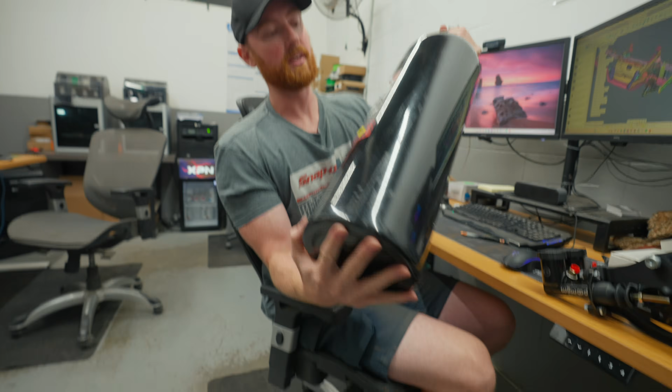Simple. Things I'm working on right now - I need to relocate this nitrous outlet bottle. This is a 15-pound extra tall bottle, total weight after it's full with liquid nitrous is 32.75 pounds. So whatever I make has to be able to handle quite a few G's while holding onto this.

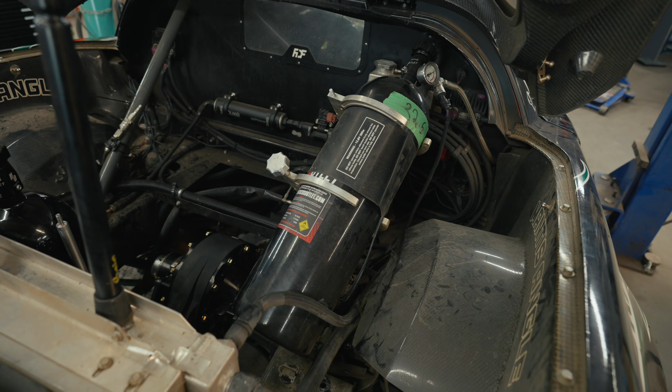I have the CAD model, I've decided where I think I want it, and basically I'm going to put it vertically. I found that I'm not using about 4 pounds of nitrous where my current bottle location is, which is on an angle mounted to my half laterals tubes on the roll cage. So I want to mount it vertically, but the bottles are too tall - it does not clear my rear trunk.

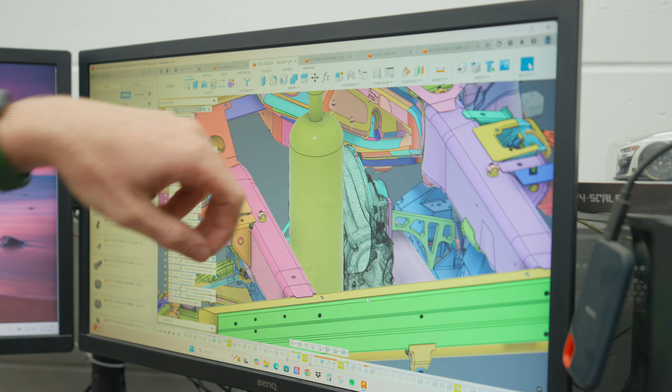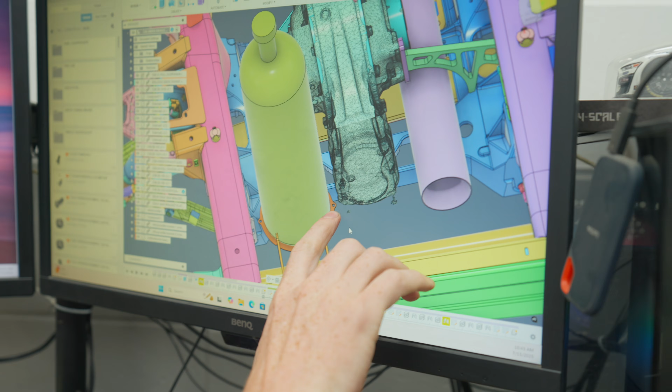So here's what I've discovered. I can mount it nice and low vertically right next to my quick change if I make a bracket off of my sway bar, and then make a vertical support with some kind of cap. Also, FD recently got rid of the clamp styles, making them illegal - I believe Ferris crashed at Road Atlanta and his bottle went flying out of the car because the clamps didn't go all the way around and didn't clamp it enough. So we're going to do a full containment style where we'll have a tube or bar come up from the bottom, and then probably a hinge style that comes down on top of the bottle and holds it down - left, right, up.

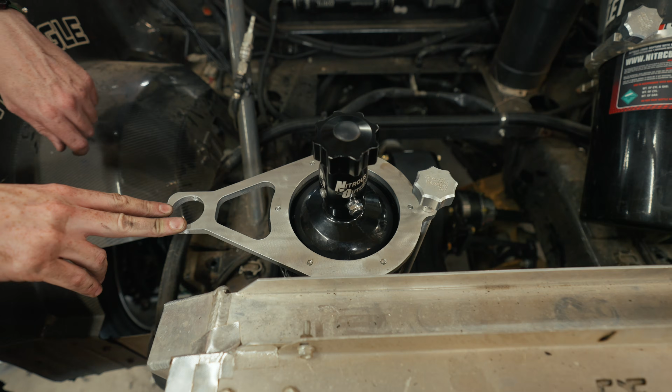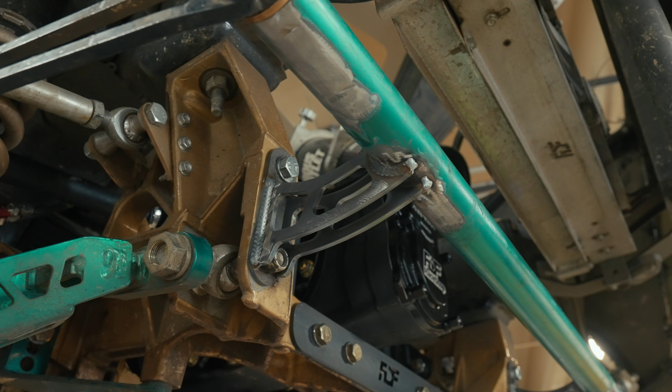Because of my bottle location, I had my sway bar mounted on top of the frame rails, bolted to these going to my rear upper, but I actually changed the location, brought it back down to kind of the OEM area, spaced it back to give me room for the diff, and now I have blades going to the control arms. You can see all that on the car. We won't have time to powder coat all these things because we have an event to leave in 2 days, but that is what I'm working on today.

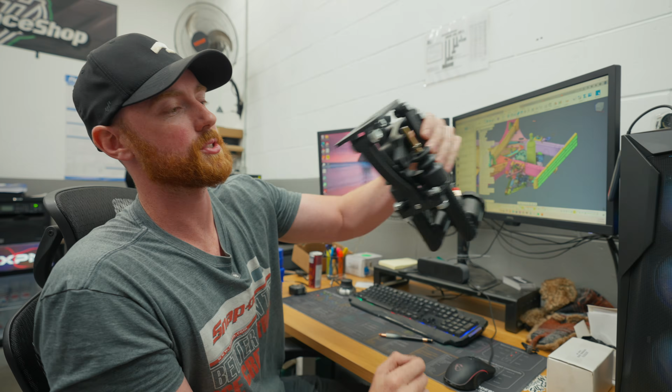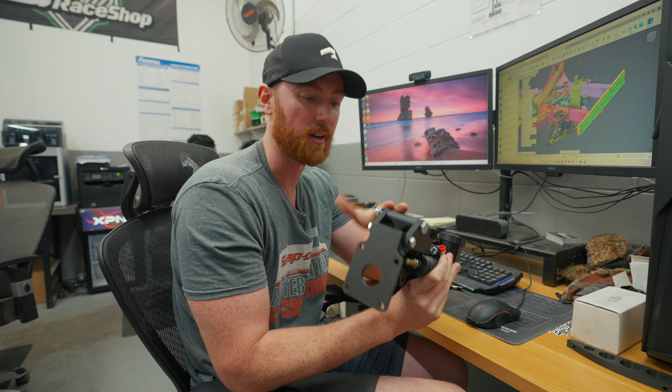Things I've been working on - this is a really nifty design I came up with. Basically there's 3 cars I've wanted to make a bias bar booster delete kit for. Vasily wanted one for his Audi, I wanted one for the E46 wagon, and I already made one for the Corvette. The problem is all these cars have different firewall flanges. Not only are they different firewall flanges, but the locations of where the bolts are consistently would interfere with where we'd have welded parts, so I had to get rid of all the welded parts.

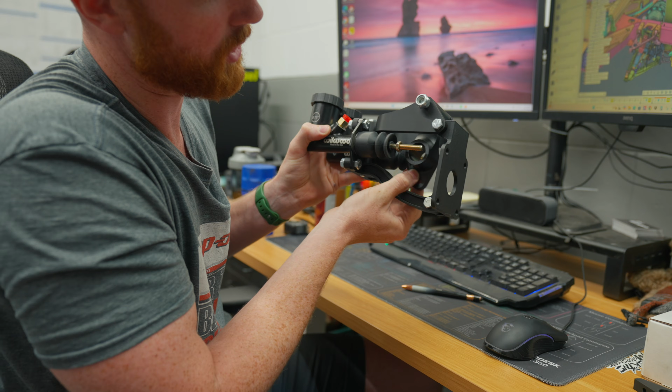So these are all going to be billet machine parts. We're actually working on these now - they'll be done in probably a week or 2, but this is the 3D printed version. We have our pivot arm, our fulcrum arm, which is what we use on the Corvette kit already. But the cool thing is this front plate is now interchangeable so I can mount a different front plate and basically fit this to every chassis just by changing the front plate. Looks simple, took a ton of time to come up with this.

Anything that is simple, the only reason it looks simple is because somebody spent a ton of time making it look that way. So this does look simple, but we've got our support from the bottom, bracing, our top, all nice joint connections. This plate is going to be easy for us to reproduce in multiple configurations. I've already designed the BMW - we've got an IS300, a Corvette, etc., etc., etc. These parts are going to be reusable for every chassis.

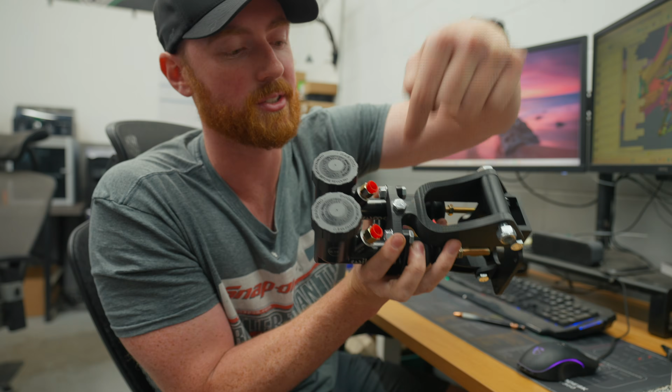So we can basically produce 50 to 100 of these at a time and only batch produce these, and this whole thing is going to work really nicely. I also have a support here joining the master mount blocks, so there's a bolt that goes through. I only had a hex bolt at the time, but it's actually going to be a socket head. It's going to be really clean, really nice, billet, all the stuff. So that's something I worked on for the last several days. I do have a CAD model of it.

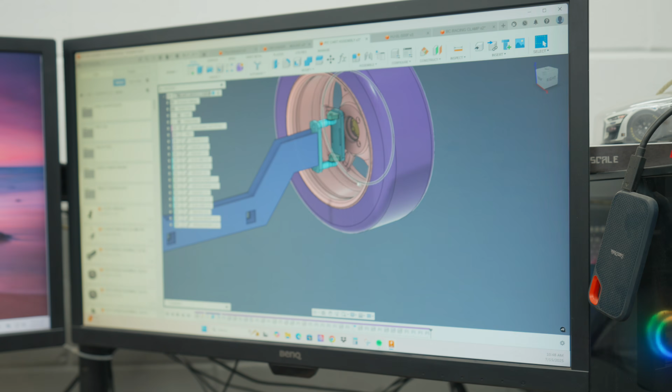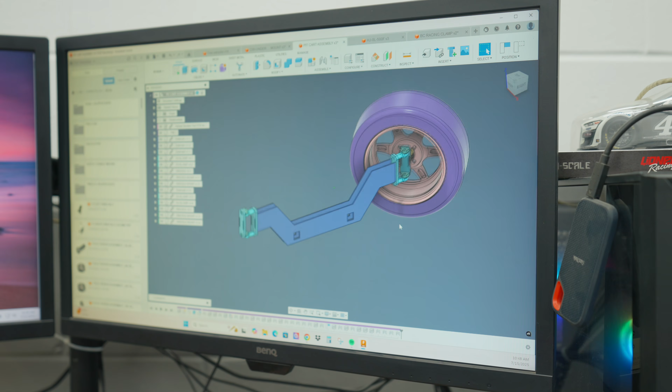Something else I'm working on, I am designing a pit cart. We're gonna be working with Kansei wheels, so they sent me the model for their wheels, and this is gonna be the front section of it. Basically, we're gonna be able to get like 80 degrees. I'm gonna have a wagon style tow bar here that's gonna be connected to tie rods, joining the left and right. I'm actually gonna put this truss structure front and rear, so the wheels will be able to turn both front and rear. I'll probably lock out the rear, but just having that ability in tight spaces is gonna be sweet. These are gonna be 4 square tubes that run the frame. I just started this last night, in my spare time, and I've barely made any progress on it. So that's another thing we're gonna be building.

We're gonna have lots of cool videos on this. Basically, I'm gonna lay everything out on the floor, take a big photo of everything I want on a pit cart, put it into the computer, design it, make it repeatable, and utilize everybody and all of our skills to produce this, maybe as a product, but definitely not right off the bat. These things, we want to build it, run it ourselves, find ways to improve it, and go on that way.

This is to give you guys perspective. We probably design 20 to 30 things a week, maybe more, and then you don't see any of it.

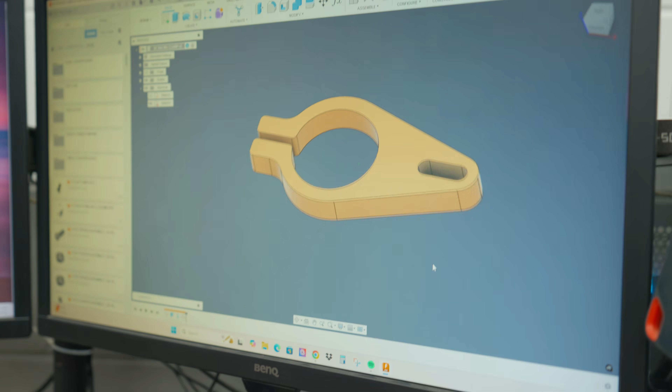This is just a BC Racing reservoir clamp. I'm gonna water jet cut this at a half inch, pop an M6 hole through here, probably thread the other half, and this is gonna be just an auxiliary clamp for the BC brackets. We could totally machine this, spend a bunch of time on it, make it super nice, maybe even list these on the website. I think that would actually be a great idea and product, but we just gotta bang these things out and get them on the car, and that's kind of how a lot of products come from that.

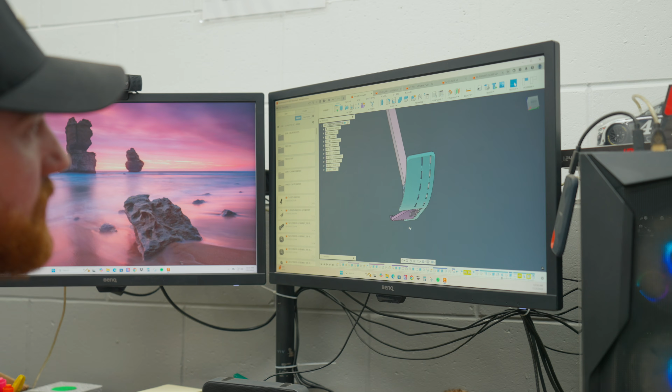There's so many things going on under the radar that you guys really don't ever get to see. Another thing we made, this is on the FDF industrial side of things. I'm not gonna say what it is, other than we're gonna be making a bunch of them, and it's a super cool project that I was doing. Essentially, you might be able to see how it would do things, but this is another cool project I was working on a couple weeks ago.

Perspective. We're designing things at a crazy rate and always testing stuff in the background. Some of the products you guys are seeing, we made a year or 2 years ago. Went through all of the testing, all of the design, all of the reworks, and now you're just seeing it. For example, all of the GR stuff that we just released. I think we released 6 products all at the same time on Friday. These products were in testing and design well over a year ago. Then we tested them throughout the winter. Then we made slight modifications. Then we sent more kits for testing out to our drivers like Elliot, who took it on to Drift Week, found one small improvement to be made, not necessarily by necessity, but just to make it that much better. Now that product is perfected, tested by multiple people, it's on the market as of last week, Friday, along with all of the other products. The rack relocation kit has been on a car for a long time, things like that.

On a daily basis, we've got a ton of stuff. On a weekly basis, we're gonna sum it all up into a video and deliver it to you guys on design time. Actually, we can do a little walk around of the car. There's quite a few things that, again, we just whipped up. You're never gonna see it, but it's on the car, and it's basically into use. There's so many things.

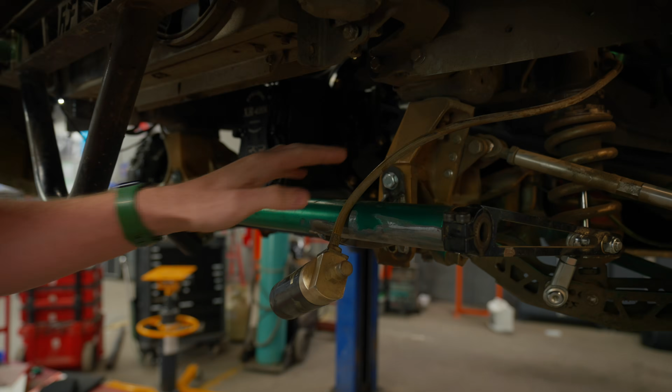Coming out to the car, we have the sway bar relocation. These plates here we had to design, make, and weld - we did this yesterday. These canisters I'm going to mount somewhere easy to reach, and we have to mount them well because these joints can leak and fail if you put any stress on them.

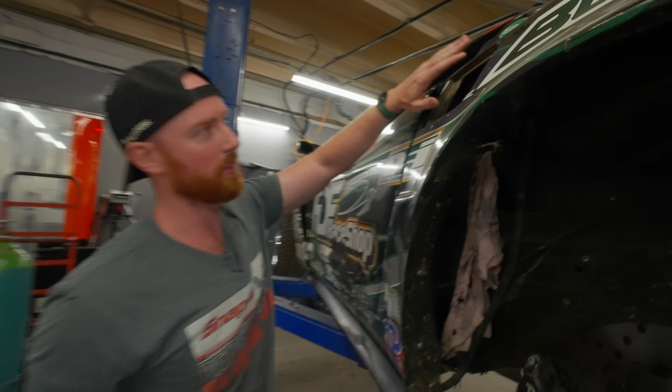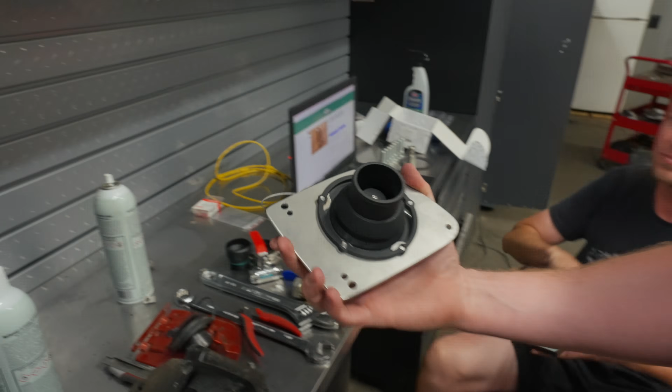You can see we've got the OEM section of the Corvette removed. Do you know where that gas door plate is? So here's the OEM setup, and then we made this super quick - a plate that's going to essentially replace that.

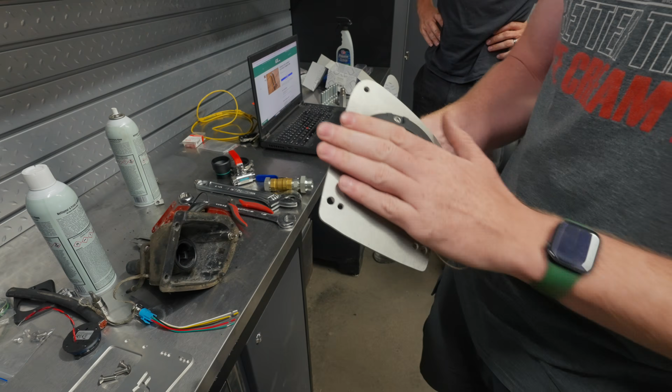This is the new performance fill cap. We want to get this on the car but in an OEM fashion, so we're going to make an adapter to connect it to the factory hose, and then send this out to James on the car we just finished, and put one on my car. It's just going to make filling it up a little bit easier, a little more race car, a little less OEM, although the OEM stuff obviously works great.

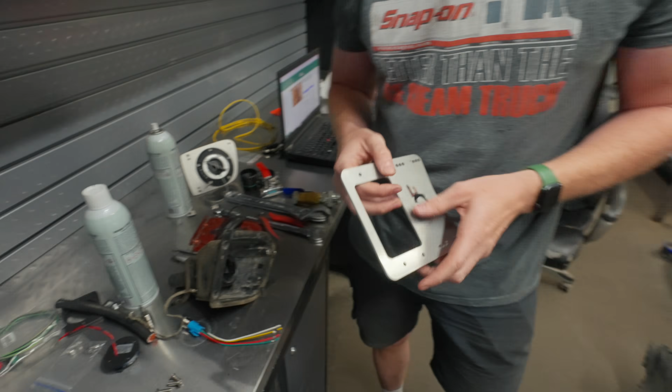On the Rush car - the design time we put into it all within a day. I scanned three parts of the car, designed seat brackets to hold the D&D seat, and made a dash mount. Once we put a different seat in it, we had to raise the steering column, which we needed to do anyways, because my knees were hitting the dash and the wheel, and the wheel was rubbing against my thighs, so we raised the steering wheel.

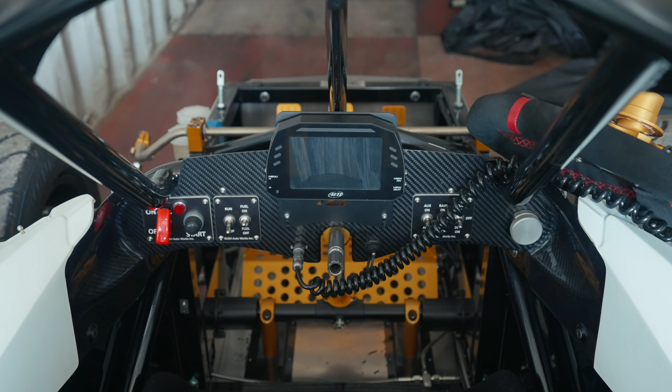This is for the AIM dash that comes with the car. We raised it up - I wasn't sure where it was going to fit, so we put multiple holes.

We also made a block off for the side pods. We drove the car through the gravel outside, and right off the bat the tire threw a bunch of gravel into the side pod - probably had 200 little stones sitting in there. I didn't want rain or rocks smashing all the electronics in the side pod, so we 3D scanned it and made a plate that zip ties in real easy, lines up with all the tubes. We threw that in.

Again, these are things we wouldn't even talk about, but we do stuff like this all day. We've got an IS300 in over there, and we're already doing some design work on that - adding some undercarriage braces and things like that.

I also did something on my diff - I raised it up slightly. The problem with Corvettes is the factory exhaust goes over the axle and out the rear, which creates a very long exhaust system plus generates a ton of heat in a concentrated area. So I raised the diff slightly and made a custom diff mount that we're not going to offer to the public, since this is just for my car, because I wanted the exhaust to go under the axle.

I needed to raise the diff a little bit, and now my exhaust is going under. Mike's going to come in and whip up some titanium 4-inch pipe that's going to blast right under the axle, and I can show you that.

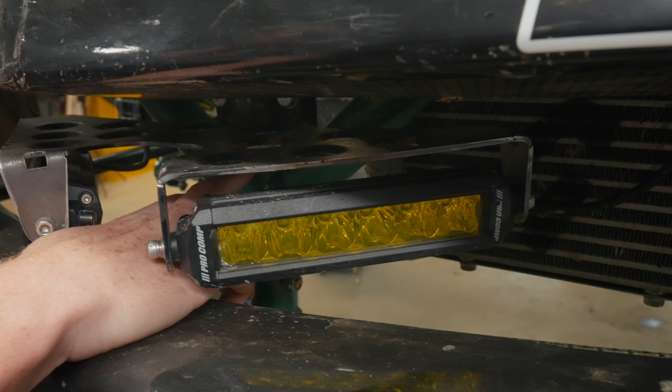One other thing - we also made this 45-degree light bracket that connects to a center tube on the bash bar. The lights are going to display at the angle of drift, since there's no reason headlights should point forward on a drift car because we're never driving straight. So we whipped that up and threw it in.

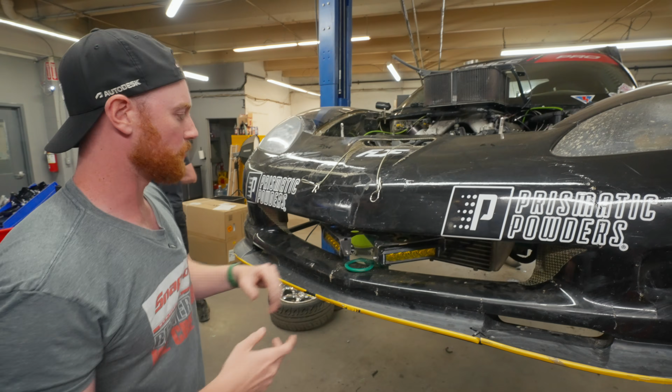These are also some tow hooks - just a single stud that goes through. This plate's welded to a tube, just a nice little hoop. It goes to the bash bar, and right here it's got this nice arc and connects to the tow arm stud.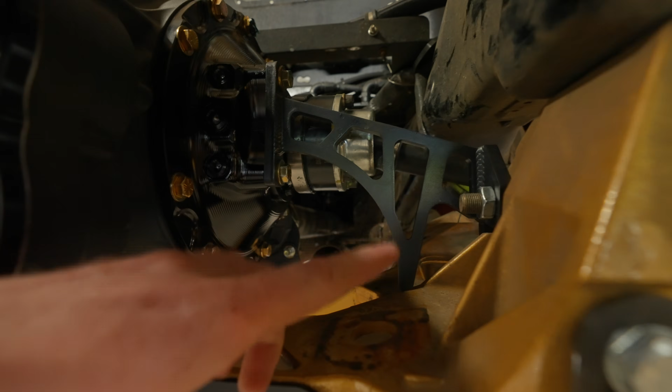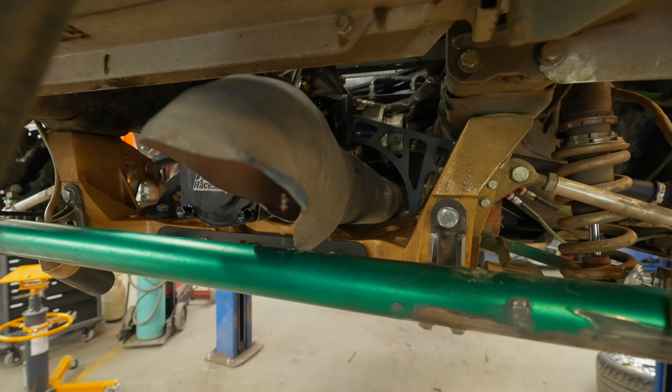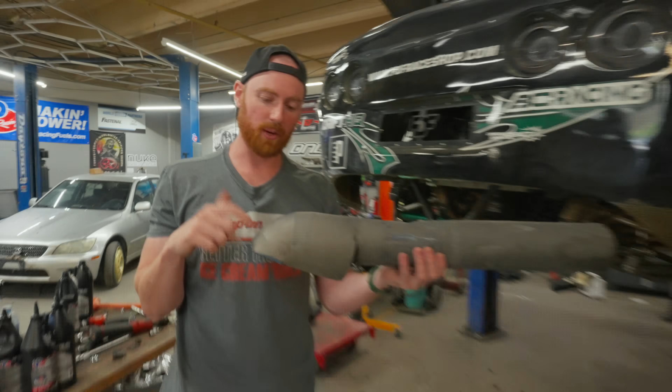So if I take this 4-inch piece of scrap pipe, I can sling it right through there, and we're going to make an exhaust that comes through this way and then does a nice dump here. We want the exhaust exiting at the back of the car so the radiator's not recirculating the exhaust fumes. This pipe on all of Driftmaster's actually exited just in front of the subframe, then we made an extension and it exited right about here, and now we're doing our last revision which is going to send it right out the back. Crazy - we're going right back to OEM style.

I actually preferred the one that exited right in front of the diff because it was the shortest, the easiest to remove if we wanted to do any transmission stuff. But whenever you're sitting in line a lot, it just bakes everything. If you're driving, totally fine, never notice any problems, but you really want your sitting-in-line cool down times to be a time for the car to cool down.

We still didn't have temperature issues, but the recovery wasn't as fast as I'd like, so I would shut the car off and keep the water pump running to drop 20 degrees. But really, we never got over 220 anyway, which is normal pickup truck operating temperature. So it was never an issue, but I wanted to correct it to make it even less of a potential problem. If we're heat soaking in Alabama or somewhere way hotter than here or Europe, we want to be ready for that.

So I know you had more questions, Jack, but that's basically the rundown on all of the stuff.

So what products are the closest to release? Probably this one, or what Dilly's been working on, which is all of our top plates that have all the adjustments. We just released all the F stuff. Maybe we'll save the top plates we've been machining — we've got a couple hundred done — for next week's design time, but this is going to be a huge product we've invested a ton into.